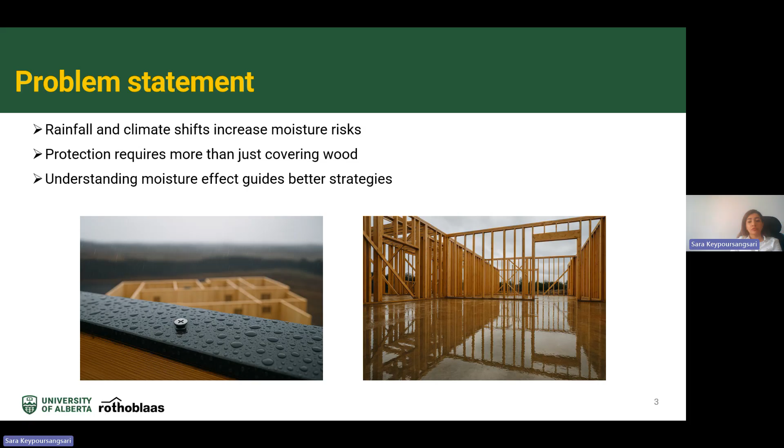It's closely tied to the design and performance of the connectors. Well-designed connectors can significantly improve the structural resistance to moisture ingress and make them an essential part of any mitigation strategy. However, implementing a successful strategy is not possible without a clear understanding of how moisture affects this type of connection. This knowledge is essential for developing targeted solutions and guiding informed decisions related to scheduling, detailing, and designing of the structures.

Self-tapping screws are one of the common forms of fasteners in timber structures, especially in hybrid structures when we have steel, wood, and concrete. But sometimes some parameters and factors affect the performance of self-tapping screws, such as design, material, installation, and environmental conditions. Sometimes these factors, or a combination of these factors, result in failure of self-tapping screws and create challenges for the structures. For example, we heard about hydrogen embrittlement.

We know that in hardened screws, when they are under tension, the presence of moisture increases the risk of failure - I mean hydrogen embrittlement failure. I'm not going through this in detail because there are other webinars which cover hydrogen embrittlement in detail, since Rothoblaas is working on this project and they will provide another webinar about that.

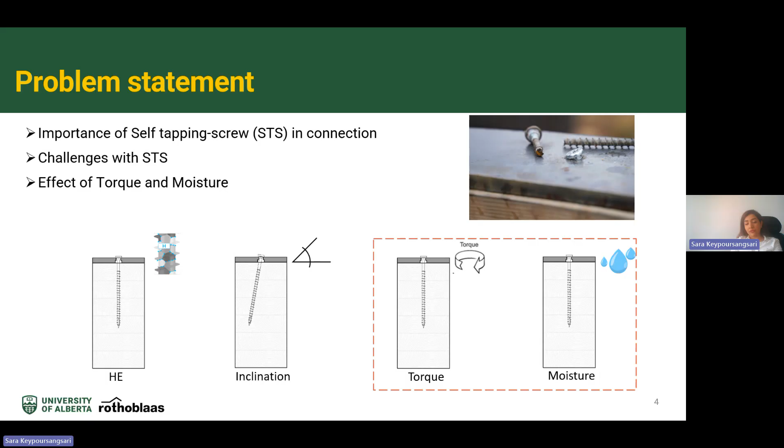Also, based on research and tests done at Rothoblaas, they found that inclined screws are more susceptible to failure in the presence of moisture. The target of this project was focusing on the effect of installation torque and moisture content change in a steel-to-wood connection, when the self-tapping screw is installed perpendicular to glulam without any inclination inside the glulam.

What motivated us to continue this project was that the failure of self-tapping screws due to increasing surrounding moisture content was reported by some contractors in North America. This project was started in 2020. It was a collaborative project between University of Alberta and FPInnovations.

They did lots of tests on CLTs, glulam, and different self-tapping screws from different manufacturers. Under the moisture content change, they couldn't find any failure. So we still heard about this problem, and we decided to continue this project. I joined this project from 2022, and after that we collaborated with Rothoblaas.

We believe that in this type of connection, I mean steel-to-wood connection, when wood absorbs water, it swells. This swelling adds additional stress to self-tapping screws because the steel plate at the top acts as a restraint, so when wood absorbs water, it cannot move freely.

This adds additional stress to self-tapping screws. When it combines with the stress caused by torque, it increases the total stress in self-tapping screws, and it may result in failure of self-tapping screws.

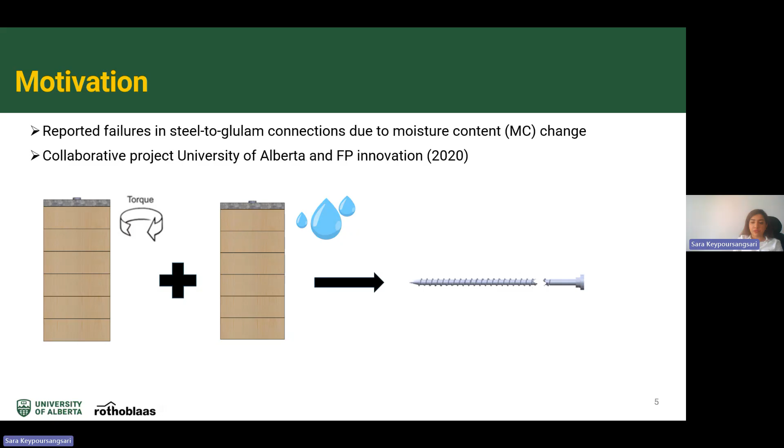If we could find the stress distribution on self-tapping screws by using some failure theories, such as von Mises theory, we can find the critical point, and also we can find the stress on self-tapping screws.

So the objective of this project was evaluating the behavior of self-tapping screws under torque and moisture content change, and also developing a model for self-tapping screws in a steel-to-wood connection under moisture content change, and to help designers have a better understanding of what's happening in this type of connection.

We divided this project into two steps. In the first step, we focus on the effect of torque on self-tapping screws, because sometimes the effect of torque in the design phase or in testing is overlooked. So we did experiments and also used an analytical model in this step.

In the second step, we focus on the effect of torque and moisture content change on self-tapping screws. In this phase, we conducted several tests. We used the analytical model to find the stress on self-tapping screws, and finally we developed a numerical model to find the stress distribution under non-uniform moisture content change, which happens inside the wood.

We start with a preliminary test, because we need some parameters as input for our analytical and numerical model. So we start with a tension test because we need some tensile properties for self-tapping screws, and also we want to know the moisture content inside the glulams in our timber member.

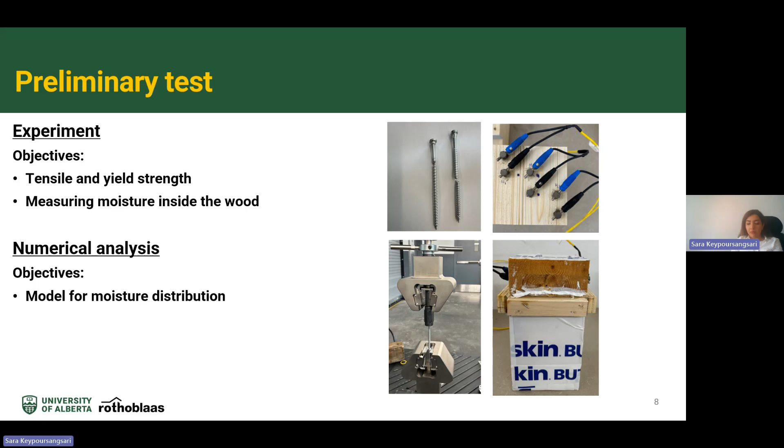Also in this stage, we try to find the analytical model and simulate the moisture distribution inside our samples.

So we start with the tension test. We use the universal tensile test machine. As you can see in this picture, in this research we focused on partially threaded self-tapping screws, HBSP, with 8 millimeter diameter and 160 millimeter length. We made special grips and fixtures to make sure our experiment is based on the standards.

We also use a 50 millimeter gauge length for the extensometer. We found the load displacement, and based on that, we found the stress-strain curve for these self-tapping screws, because we need some inputs such as Young's modulus, yield strength, and ultimate tensile strength for our simulation.

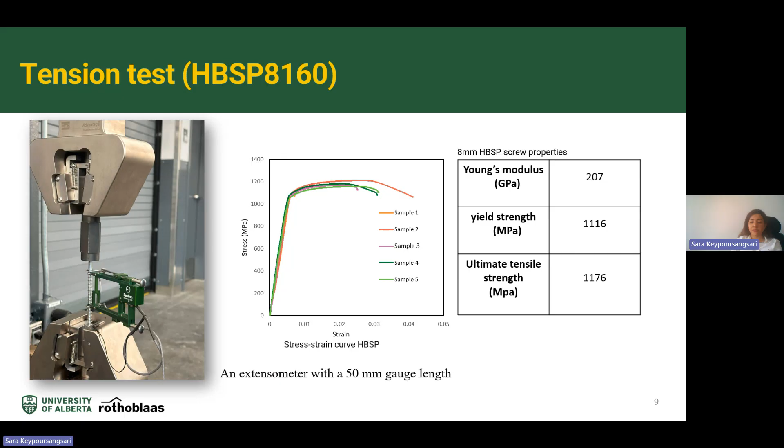The second part focused on finding the moisture content change inside our samples. We did several tests to find the best method for finding the moisture inside the wood. Finally, we used the insulated electrode pin to find the moisture inside the glulam in different layers.

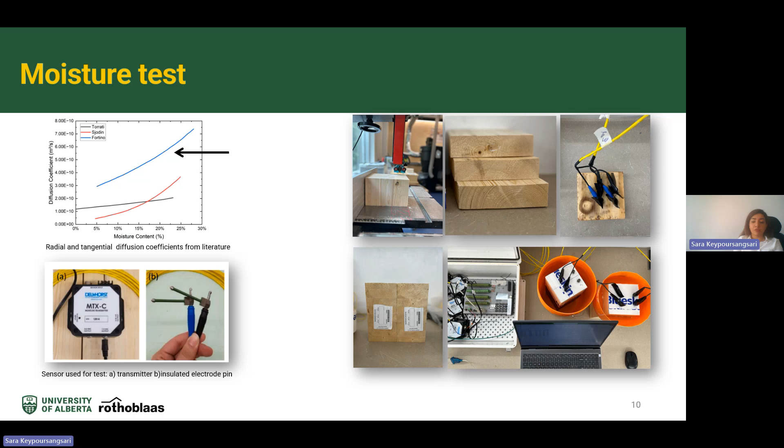Also in this step, we developed a numerical model as well. In order to simulate the moisture transport inside the wood, we need to have the diffusion coefficient. So we did a parametric study, and based on that, we found the best diffusion coefficients for our samples.

In this simulation, we used the single Fickian method, which is a practical method for finding the moisture transport inside the wood, based on Fick's law. According to Fick's law, moisture transport moves from high concentration to low concentration areas. In order to simulate this movement and the non-uniform moisture content change, we use the hydrothermal analogy method in Abaqus software.

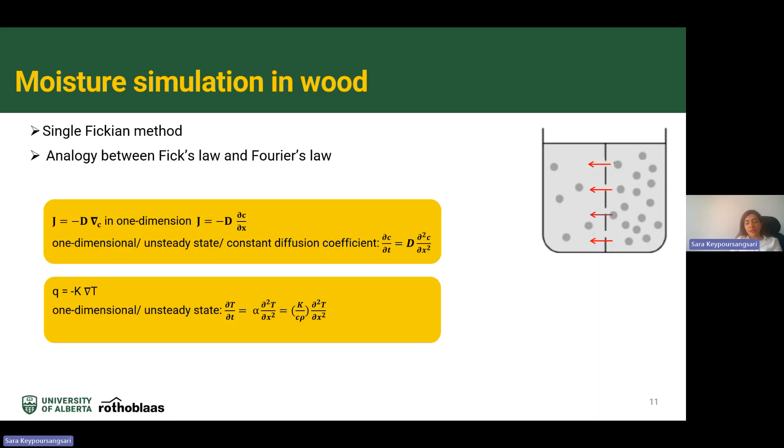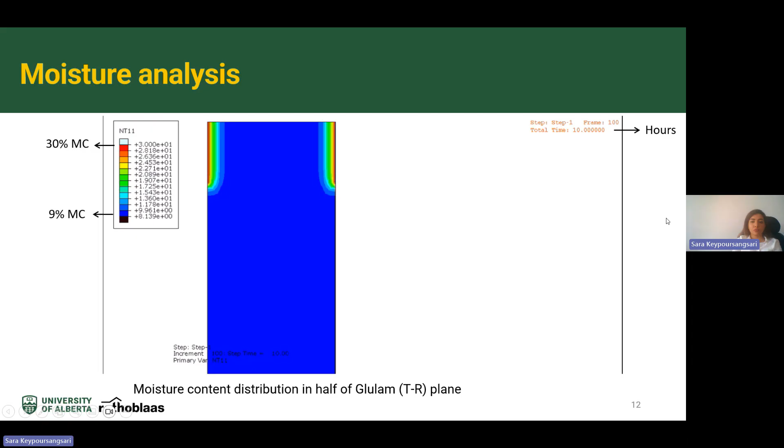So we start with our main test. Our target in step 1, dry condition, was finding the effect of torque on self-tapping screws, because usually the effect of over-torquing was overlooked. We know that when we apply high torque and over-torque the screw, we can damage or fail the screws.

So in order to find the stress on self-tapping screws, we started with dry condition, step 1. The objective was measuring the failure torque and investigating the correlation between clamp force and torque. We also focused on analytical models, since there are equations available for bolts, nuts, and lag screws in wood, but we weren't sure these applied to self-tapping screws.

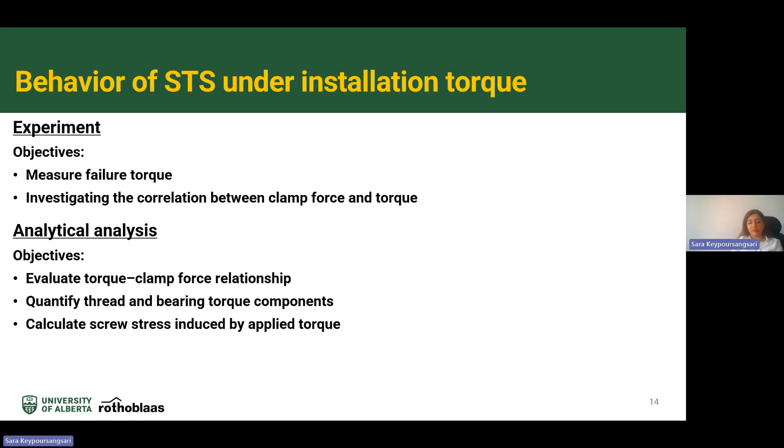So we did some tests to make sure these models are applicable for self-tapping screws as well. The objective of this part was evaluating the relation between torque and clamp force, and finding the installation torque based on bearing torque and threaded torque. Finally, based on these, we can find the stress on self-tapping screws.

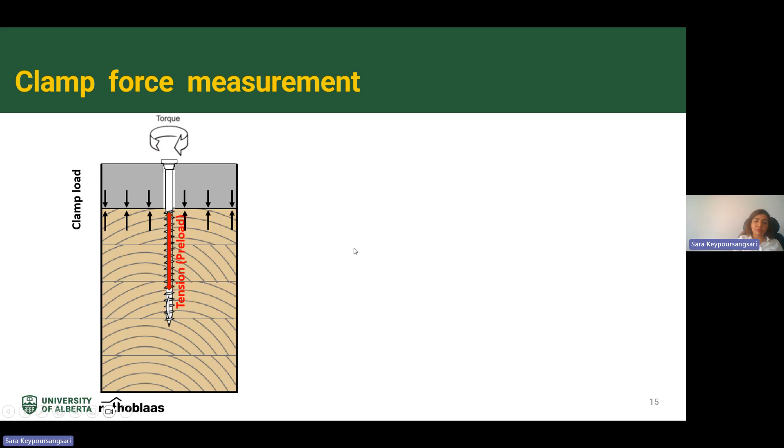When we apply torque on fasteners like self-tapping screws, we are increasing tension inside the fastener, called preload, and increasing compression between the members, called clamp force. If there is no separation and no external load, this preload equals the clamp force. To measure that, we placed load cells between the steel plate and our glulam to measure this load.

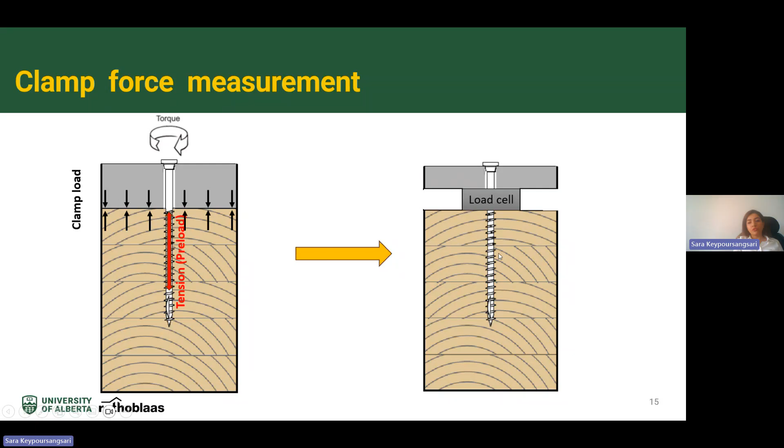So in this part, dry condition, step 1, first we made a pilot hole and then installed the self-tapping screws. When the head of the screw reached the steel plate, we used a manual torque wrench to tighten the screws. We divided our samples into 3 different groups.

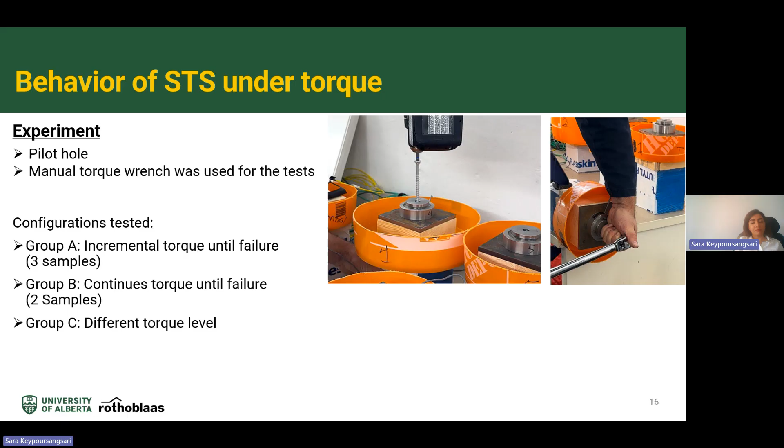In group A, we increased the torque incrementally. In group B, we increased the torque continuously. And in group C, we increased the torque to different levels. In groups A and B, we increased the torque until we got a failure. But in group C, we only increased the torque before getting any failure, so in group C we don't have any failure.

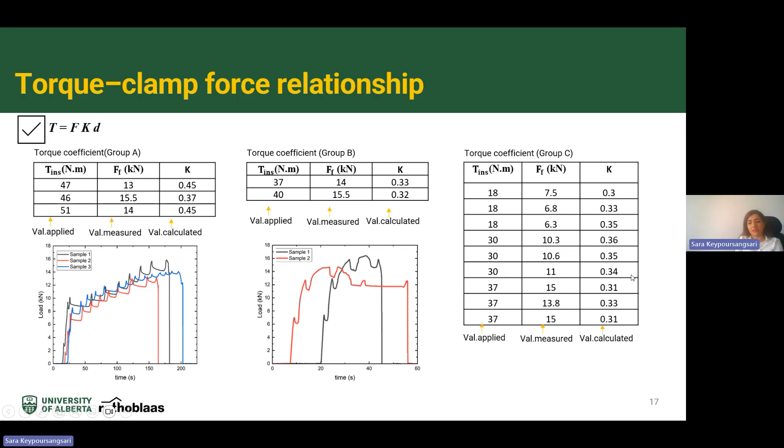In the second part of step 1, we focused on installation torque, because the installation torque is a combination of bearing torque and threaded torque. Bearing torque is due to friction between the underside of the screw head and the steel plate, while threaded torque is due to friction between the threaded part and the glulam, also affected by the shape and profile of the screws.

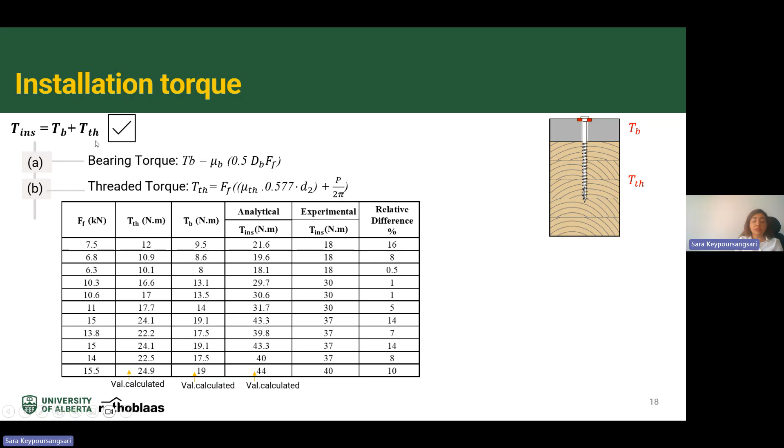The reason we did that is because we want to find the stress on self-tapping screws, and we need to know about the threaded torque.

This is why we thought this is something important when we are over-torquing our self-tapping screws, and it's the effect of the shear stress. In the case we over-torque the screws, we have axial stress and shear stress. Therefore, we use the von Mises stress to find the stress on self-tapping screws, and you can see how shear stress affects the results.

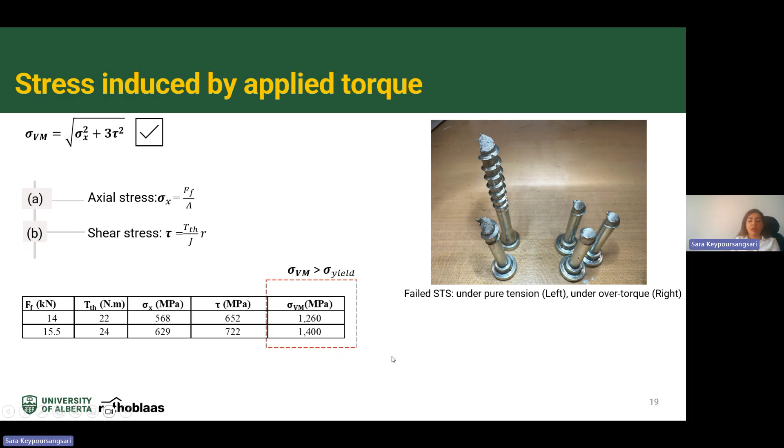In the failed screws, in group B, we calculated the von Mises stress, and we found that the von Mises stress in these two cases was more than the yield strength, and that's why we get the failure in these screws.

The second step of this project focused on the effect of torque and moisture content change on self-tapping screws. In order to increase the moisture inside the glulam, we attach a bucket of water to our samples. To increase the level of moisture, we increase the height of the bucket, as you can see in the next slides. The objective of this part was measuring the load caused by torque and moisture content change on self-tapping screws.

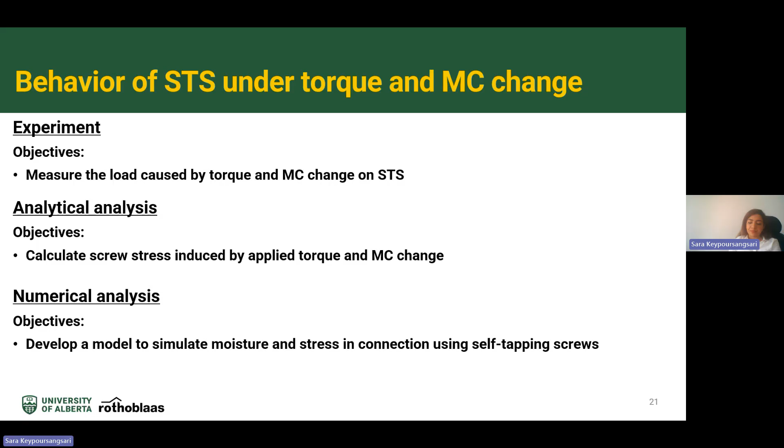Same as the previous steps, we used the analytical model and calculated the stress on self-tapping screws. Finally, in this stage, we developed a numerical model to simulate the moisture and also the stress on self-tapping screws.

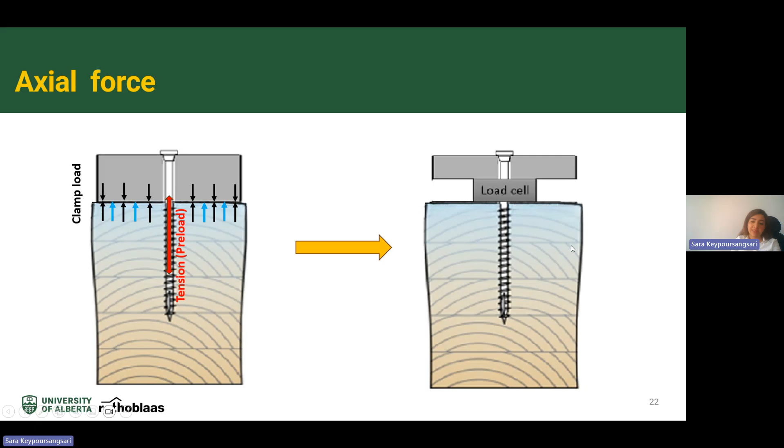Same as the previous steps, in order to measure the load caused by torque and moisture content change, we place load cells between the steel plate and our glulam, and we increase the moisture inside our samples. We divided this step into different rounds. In the first round, our objective was finding and investigating the relaxation phase, and also measuring the axial force in wetting condition.

We divided our samples into two different groups. In group A, 3 samples had self-tapping screws installed with recommended torque, and in group B, 3 samples were installed with over-torquing around 30 Newton meter. We also poured water inside the bucket to increase the moisture inside our samples. The level of water in this case was 48 millimeters, which was less than 2 lamellas.

Here you can see the results of load, measured by the clamp force. In group A, where we increased the torque up to 18 Newton meter, you can see how the load increased during tightening, and only a few seconds after installation, this load starts decreasing. This phase is called relaxation, and it happens for all connections and fasteners, but it depends on the material. There wasn't much data about how this relaxation phase would be in timber connections, so we stayed for about 24 hours to see how it would develop.

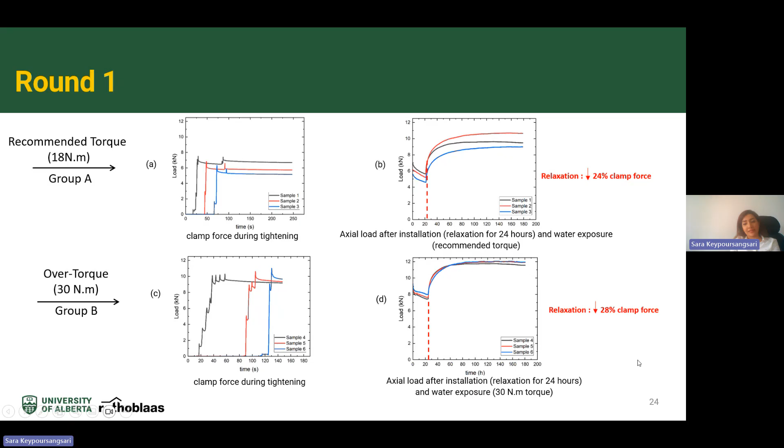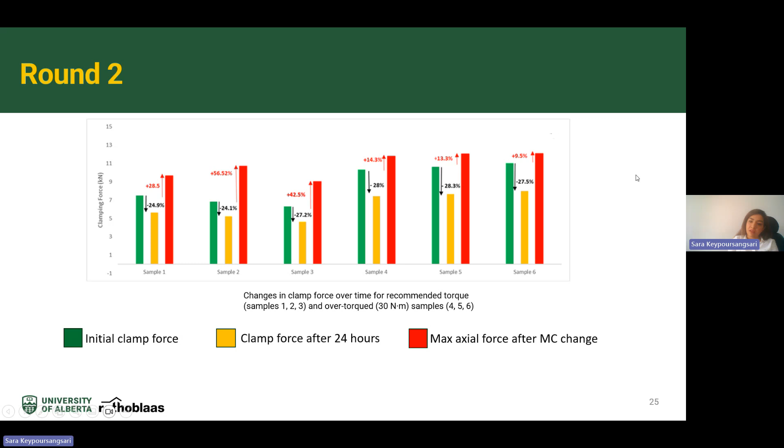Here you can see the summary of the results and the effect of relaxation after 24 hours, and also the final load measured by the load cells. This figure shows the importance of the installation torque, because in samples 4, 5, 6, we applied torque about 30 Newton meter. The level of moisture was the same, but in samples 4, 5, and 6, the over torque was higher than these samples, and you can see the final load in group B was higher.

Round 2 of the test focuses on the combination effect of over-torque and moisture content change on axial force in self-tapping screws. In this round, we increased the torque until 37 Newton meters, and our target was finding the effect of different levels of moisture.

So we divided our samples into 3 groups. In group A, only 2 layers of glulam were exposed to water. In group B, 3 layers were exposed to water. And in group C, we wholly submerged our glulam into the water.

In this round, as you can see here, same as the previous round, we applied the torque and over-torqued the screws until 37 Newton meters. In this stage, we didn't stay for the relaxation phase, and we poured the water only a few minutes after installation. You can see the results.

The results show that this axial force, caused by the torque and moisture content change, starts increasing first until it reaches the peak, and after that it decreases slightly.

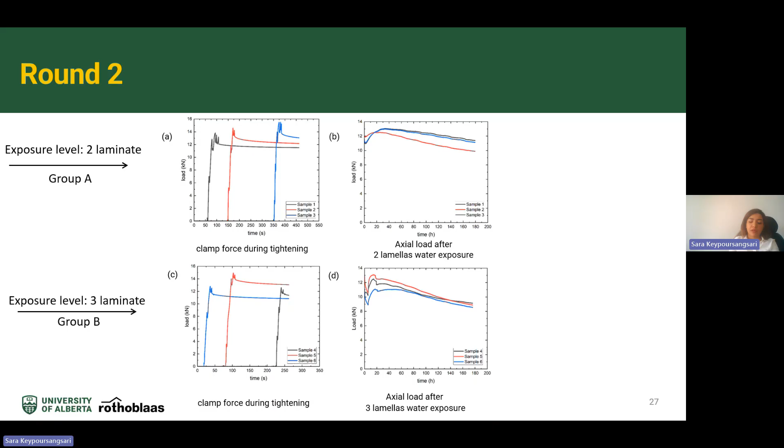And here you can see in this figure that since we exposed more layers to the water, this decrease is more significant.

So we measured the Von Mises stress, considering that for sample 11, which is the worst case scenario, the moisture only affects the axial stress, and the shear stress is only due to the installation.

Also, based on the previous round, we found that there is a relaxation. So we measured the Von Mises stress, and we found that in this worst case, sample 11, the Von Mises stress is below 1000 megapascal.

It should be mentioned that we opened all the samples and couldn't find any failures in the self-tapping screws, even under severe moisture content change.

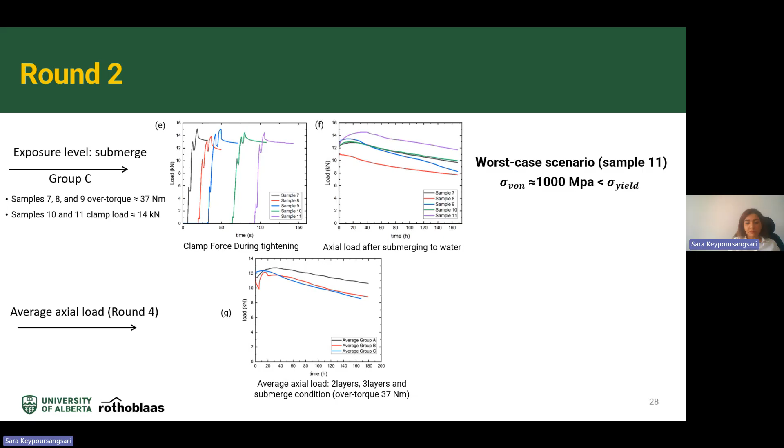Finally, in round 3 of this test, we want to verify that hydrogen embrittlement failure does not occur with correct installation. In this round, we divided our samples again into two different groups.

In group A, we fully submerged our sample into the water, and in group B, we put our samples upside down into the water. Our target was finding whether we could detect any failure under severe moisture content or not. Also, in this step, we didn't use the load cells because we wanted to increase the penetration length.

Finally, we tried to develop a numerical model. You may ask why we need a numerical model - because sometimes doing tests is time consuming and costly. They need lots of investment, and also sometimes they limit the number of specimens or materials we can test.

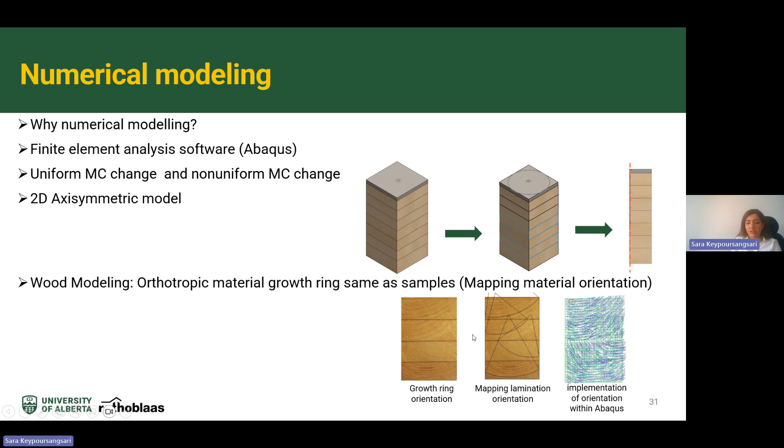So we model our glulam, and in each layer we consider the effect of the growth ring, because we know that wood is an orthotropic material and the material properties change in the radial, tangential, and longitudinal directions. We simulate the growth ring for each layer of glulam, and we also consider the effect of moisture on the material properties of wood.

We opened most of our samples, and we couldn't find any severe damage, severe crack, or withdrawal. That's why in our simulation we didn't consider the effect of withdrawal failure or any kind of crack.

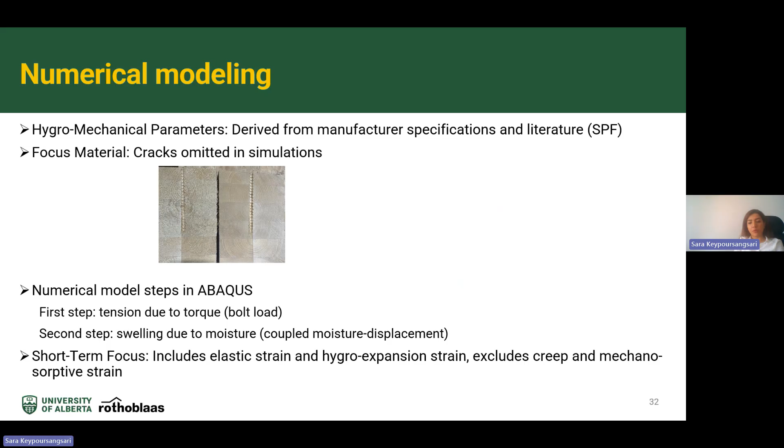As I mentioned, we use a two-step numerical model with the Abaqus software. We consider the effect of torque and the effect of moisture content change in the short-term condition, because we only put our samples exposed to water for one week. So we didn't consider the effect of creep and mechanosorptive strain.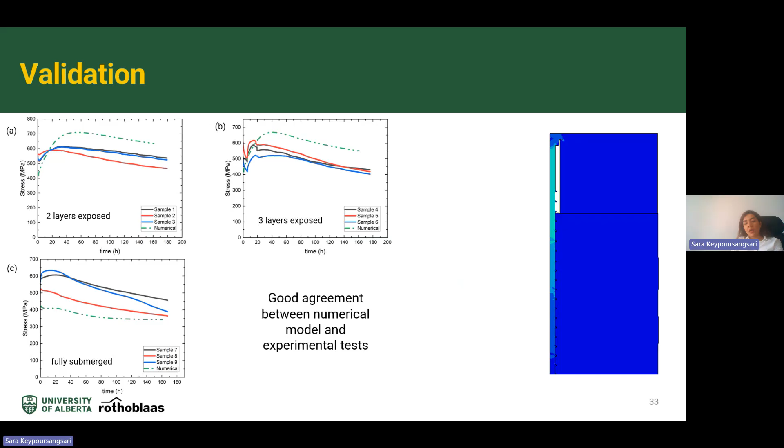Here you can see the results. The green dashed line shows the result from the numerical analysis. This is the axial stress in self-tapping screws caused by torque and moisture content change.

So based on what we found, due to moisture content change and non-uniform moisture content change, which happens inside the wood, the axial force increased on the first day and reached its peak. But afterward it started decreasing, and there was a greater decline as more layers were exposed to water.

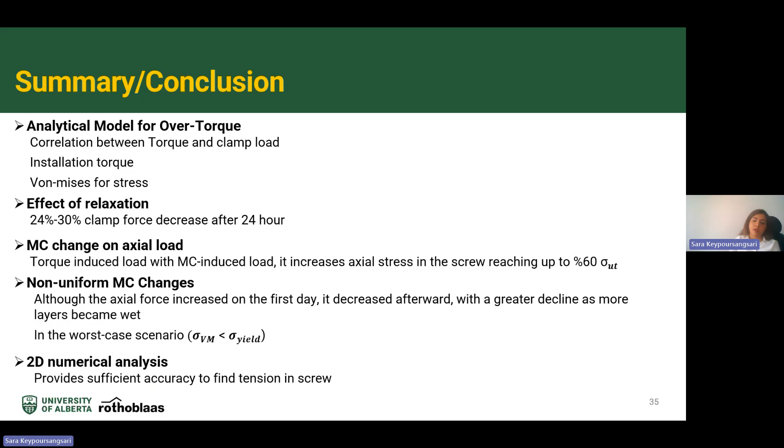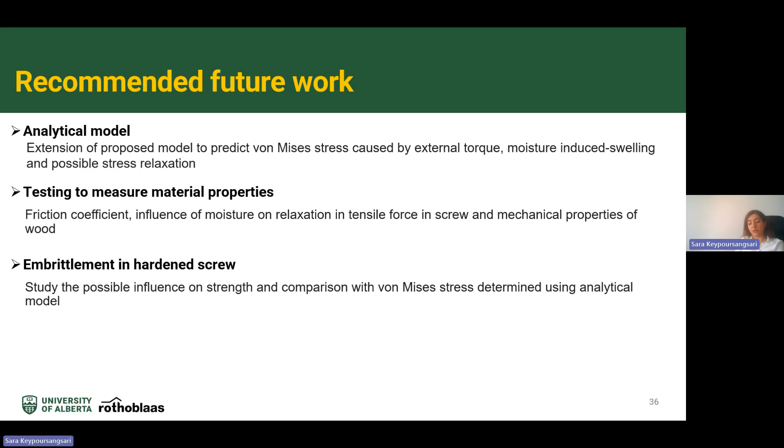Thank you for your attention, and I would be happy to answer if you have any questions. Thank you for your time.